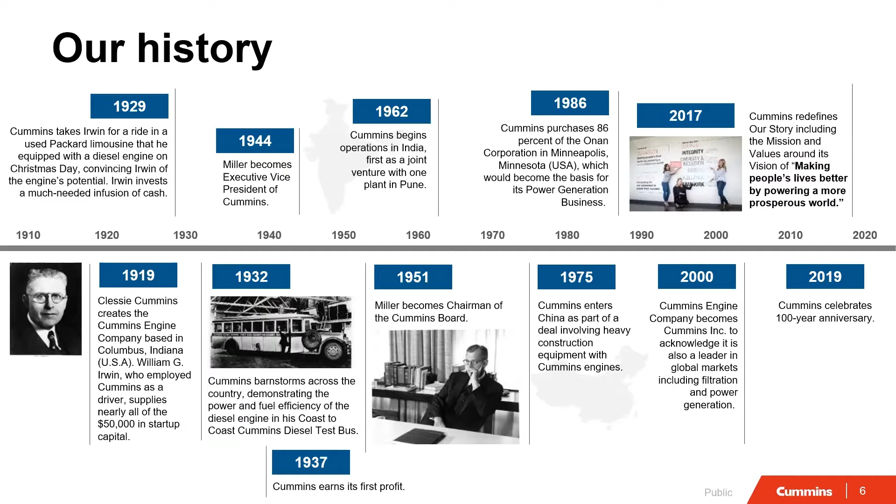As we continue to power a prosperous world in 2020, Cummins has grown into a multinational corporation. We're a Fortune 500 company with presence in 190 countries. We employ over 57,000 people through our 8,000 distributor and dealer networks. In 2020 alone, we built over 1.3 million engines and invested close to $1 billion in research and technology.

As you know, Cummins caters into a wide variety of markets and applications. We are in anything from heavy light-duty trucks to construction equipment, from fire pumps to oil and gas rigs, from power generation to defense and rail - you name it.

However, today's focus will be on our marine portfolio, which includes the Cummins propulsion engines, the auxiliary engines, the marine generator set, and the Onan range.

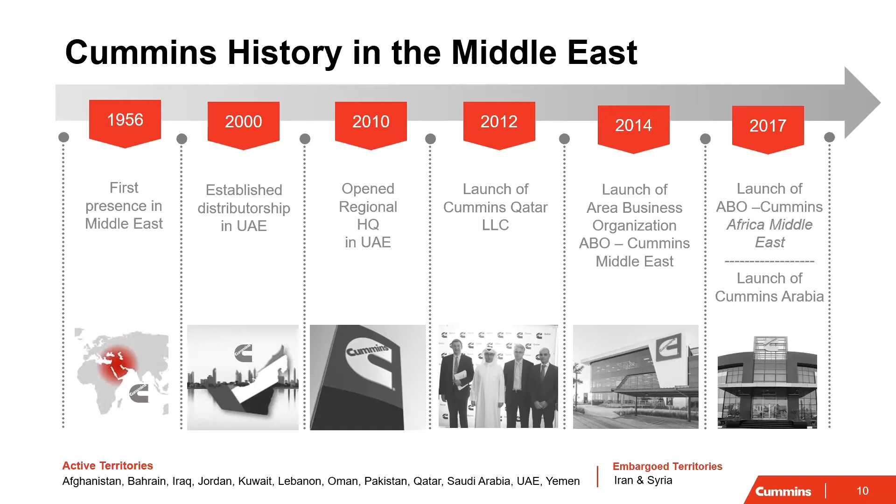Now, Cummins made its first presence in the Middle East in 1956. We set up our first distributorship in UAE in the year 2000, followed by our regional headquarters in Jebel Ali, which was opened in 2010. In the year 2012, we saw the launch of Cummins Qatar, followed closely by the launch of the Cummins Middle East Area Business Organization. Finally, in 2017, we set up the Cummins Africa Middle East ABO and the Cummins Arabia joint venture.

So back to the question of who we are. Cummins Arabia is a joint venture with Cummins Inc., the parent company, and the Saudi-based Olayan Group. It was set up in the year 2017, and we represent the Cummins distribution business in the UAE, Saudi, and Kuwait. Cummins Arabia has an extensive dealer and service network, which comprises 11 service branches, 8 warehouses, a master rebuild center in Jebel Ali, and a world-class state-of-the-art training facility also in the Jebel Ali headquarters.

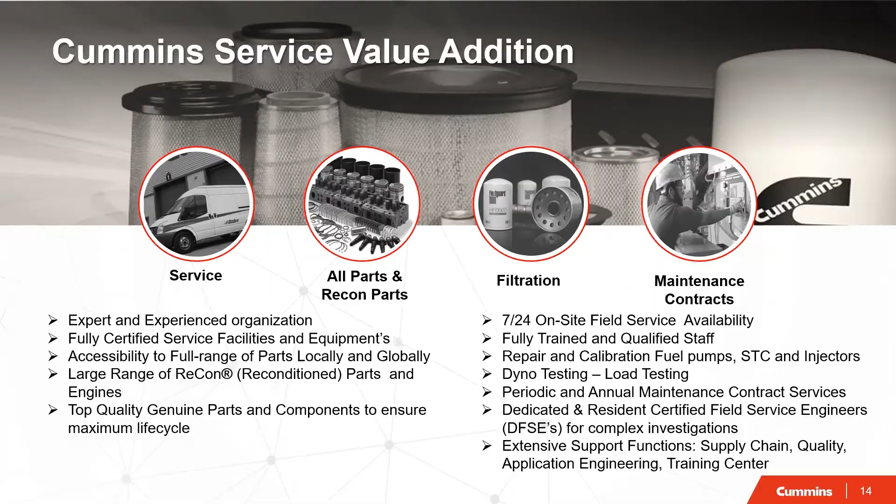Here you can see our build-up capabilities for our service locations in the region. We have a very wide inventory level benchmarked to other providers. Our total stock value is around $40 million, and most of this stock is located in UAE, around $22 million of stock parts we have in UAE. But more than this, we have global online visibility to all Cummins main warehouses globally. We call them PDC.

We also have visibility to all other distributors around the world, and can see their stocks online. So if any part is required and available anywhere in the world, we can quickly see, locate, and order it. We also have emergency order, engine down order by air freight facility, so we can bring this part to you in the shortest time.

In UAE, we have 2 service centers and 2 fuel rooms, which do the repair and calibration of fuel pumps and injectors. All our facilities and processes are ISO 9001, OHSAS 18001, and ISO 14001 certified. All the equipment and measurement tools are regularly calibrated and certified so we can maintain a standard in our jobs.

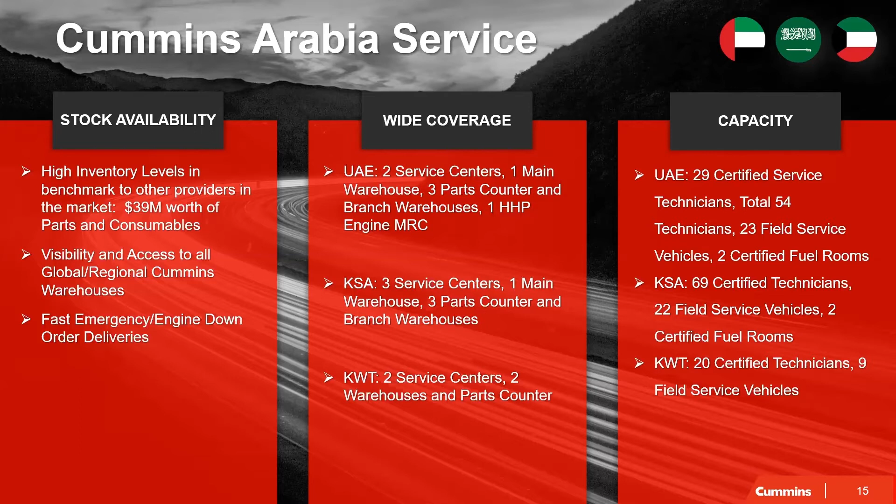Here you see the service locations in the region under Cummins Arabia. In the field, we are providing 24 hours, 7 days service to our valuable customers. We have a customer call center with a single number which you can access 24 hours, 7 days.

When you call for any need, even after hours, the call center will reach the relevant supervisor on duty. This supervisor plans the jobs, arranges the parts from the warehouse, and deploys the technician to your site, to your vessel, for the job in after working hours as needed. All our technicians have their own pickup trucks, which they keep with them all the time, so even after hours, we can deploy them directly to the site in a fast way.

We provide 100% genuine Cummins parts, including Recon components like cylinder heads, injectors, fuel pumps, and turbochargers from our globally certified Recon centers with global warranty coverage. My colleague Prafula will give further details about this later today.

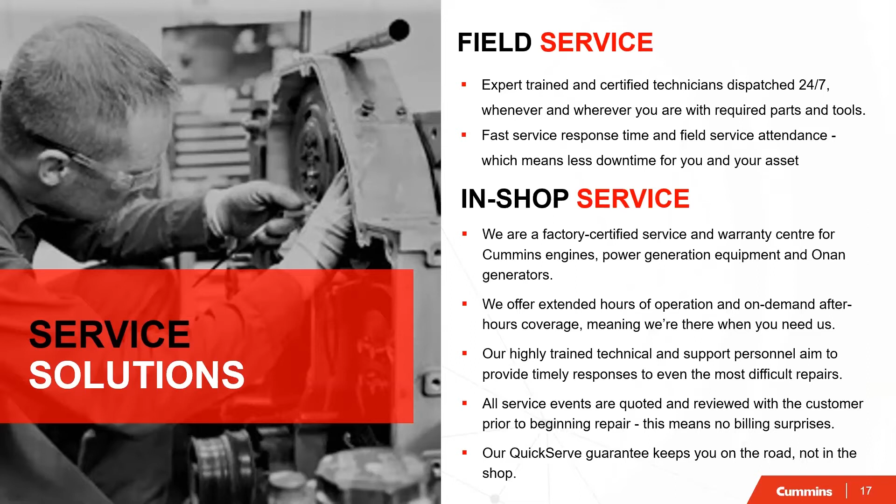We are also offering PMC, periodic maintenance contract, and AMC, annual maintenance contract, packages and contracts to you. We can plan and schedule a full scope of periodic preventive maintenance activities for your units. You can follow up the running hours with us and plan and execute these maintenance activities to help maintain a good life cycle for your units and prevent more major problems. Normally, this offer is mostly preferred by genset fleet owners and facility management companies, but we also offer this to our marine customers and certain customers who have contracts with us.

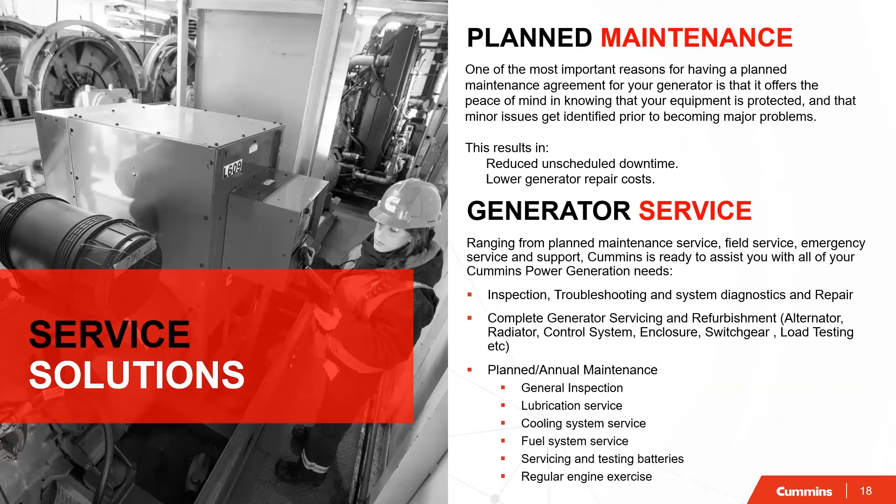Other than the engine, we also do generator servicing and generator refurbishing. We can provide a complete genset refurbishment. This includes control systems, alternator, cooling system, and radiator servicing. So these are all within the scope of our service capabilities.

In UAE, we have 2 resident dedicated field service engineers. These are highly experienced engineers who are trained and certified by Cummins factories. As you know, engines and generators are complex technological products, and they may develop certain complex problems over time. The DFSEs are capable of performing complex troubleshooting on your products. They have full access to all engineering information about your products - design, manufacturing, and application engineering documents. They also have an engineering counterpart in the factory, so through the investigation, they get full factory support from this engineering counterpart. They can conduct a detailed root cause analysis on any problem with a systematic approach and complete technical resources.

Finally, we have a training center located in Jebel Ali. For us at Cummins, we believe that helping our customers understand and know their Cummins products better is not only for your benefit, but for ours too. However, due to COVID-19, classroom trainings were suspended from 2020 onwards. Now we've started to plan new classes with limited attendees. So if you have any training needs, please advise us and contact me. We can provide the classroom schedule to you for your team and technical staff.

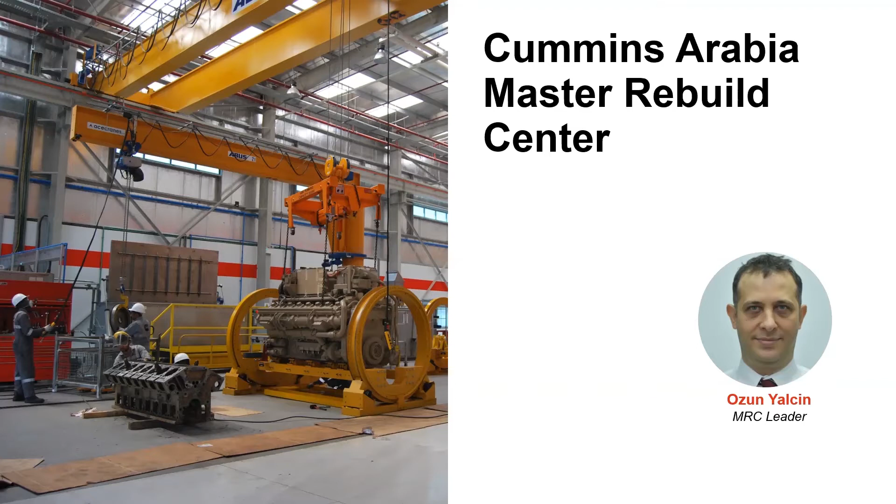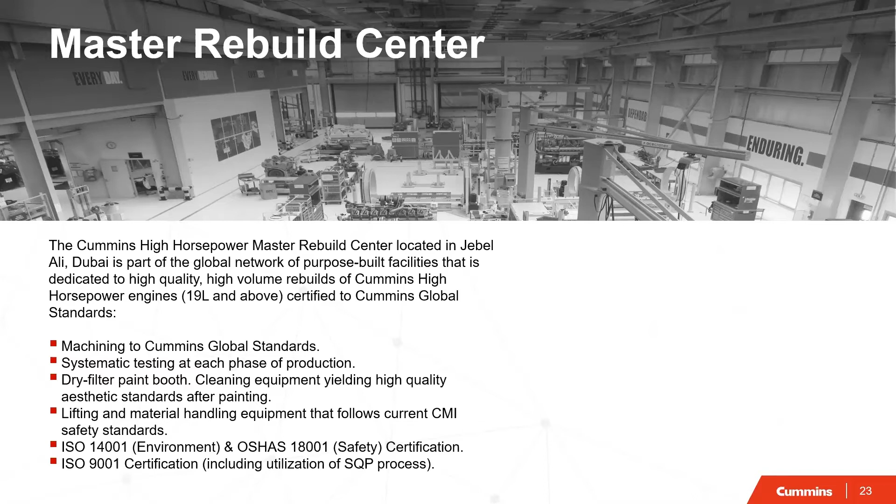Our Master Rebuild Center - we use the abbreviation MRC for that, you will hear that a lot, and it stands for Master Rebuild Center. MRC is located in Jebel Ali. It's a dedicated facility for rebuilding high horsepower engines, 19-liter and above. Rebuilds are done in a progressive assembly line. We have 2 assembly lines, and everything is done as per Cummins global standards using original, genuine Cummins parts. At the end of the assembly, engines go into testing, and then after that we have a paint process. I'll come back to those details later.

I'd like to start with the definition of rebuild. After certain hours of running, wear increases over time on the engine, and the engine needs to be disassembled and reassembled again. In Cummins language, rebuild means assembling the engine in a way that it goes back to brand new engine specifications, brand new engine conditions.

For this, MRC has a standard bill of material, and the majority of the performance parts are replaced. We ensure that the engine goes back to brand new engine specifications by testing it on our fully automated dynamometer. We run a full load test, check every single parameter on the engine, and compare it with brand new engine parameters. This way, we can say it's like a brand new engine, with a full life cycle just like a brand new engine. That's how we can give a 1 year full warranty on the rebuilds.

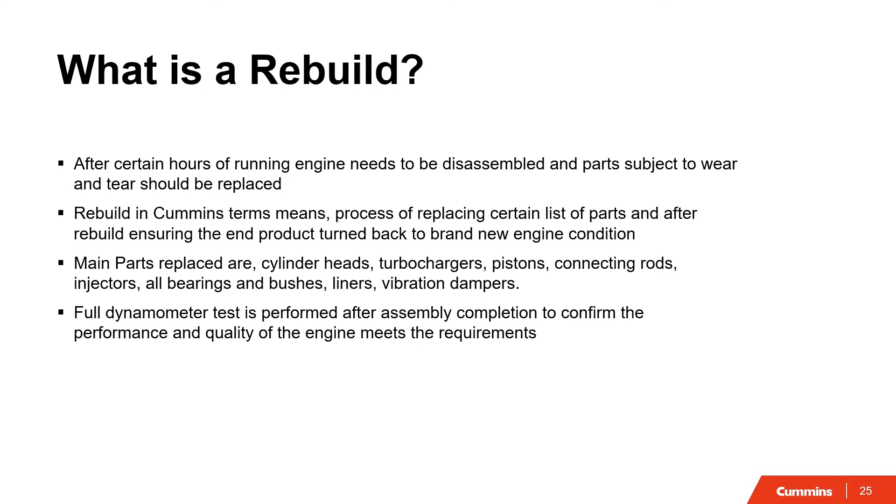One question we're often asked is: when is a good time for a rebuild? The basic answer is there are no standard hours defined for that. It just depends on so many factors, like which application it is, whether the engine is well maintained, and what environmental conditions the engine is running in.

And also the load factors. Is it too fluctuating load? The running habits, just is it overspeeding for a long time? So these are the things that affect that.

But for an engine run at an optimum value and well maintained, we suggest our customers take 25,000 hours as a good running time for rebuild. Because the wear and tear goes steady most of the time throughout the engine's life, and then there comes a point where wear increases much more rapidly. This is the phase right before major component damage or even catastrophic failure, so rebuild has to be done before that.

For an engine which is not well maintained, 25,000 hours can be way too long. For example, a mining truck, 25,000 is too long. It's just too late for rebuild.

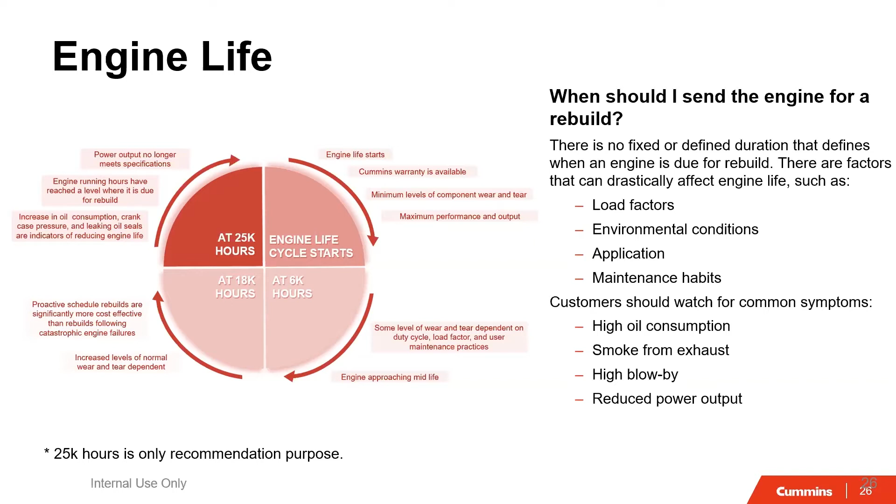So our customers should continuously be checking the signs and symptoms indicating the engine needs a rebuild, like power output is one indication, and also smoke, blow-by, high oil consumption, and leaks coming from everywhere. These are the indications that the engine is going to need a rebuild.

So another question we've often been asked is: what is the difference between rebuild and overhaul? Actually, these are two different concepts. In the rebuild, the engine goes back to brand new original spec, and on the overhaul that's not the prime aim, the prime target. Rebuild has a standard bill of material, so no matter what, these parts are going to be changed. On the overhaul, it's most likely an inspect-and-reuse-if-possible logic.

Rebuild comes up with a standard price, and if the block and crank are good and the major components are good, there won't be any surprises. On the overhaul, it starts with a smaller scope, and there will be add-ons.

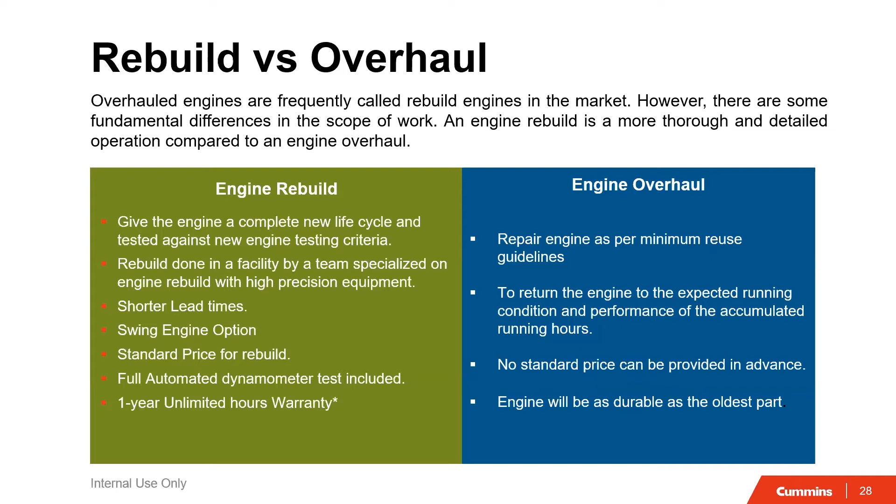So we provide a longer lifetime on the engines with rebuilds. These are the customer conveniences. We've gone through this throughout, but one of the major conveniences for the customer on a rebuild, as I said, there are no surprises, and the customer can drop their engine and then pick it up. There won't be so many communications or discussions needed—it's just going to be a simple task for the customers.

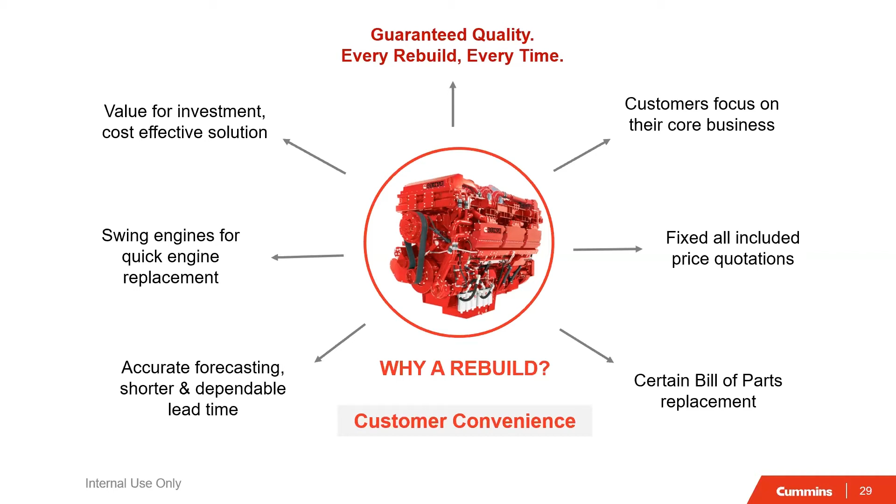And also, Cummins has swing engine options. We have the shortest lead times compared to overhaul, even in-frame overhaul, and the rebuild quality—we've gone through all of this.

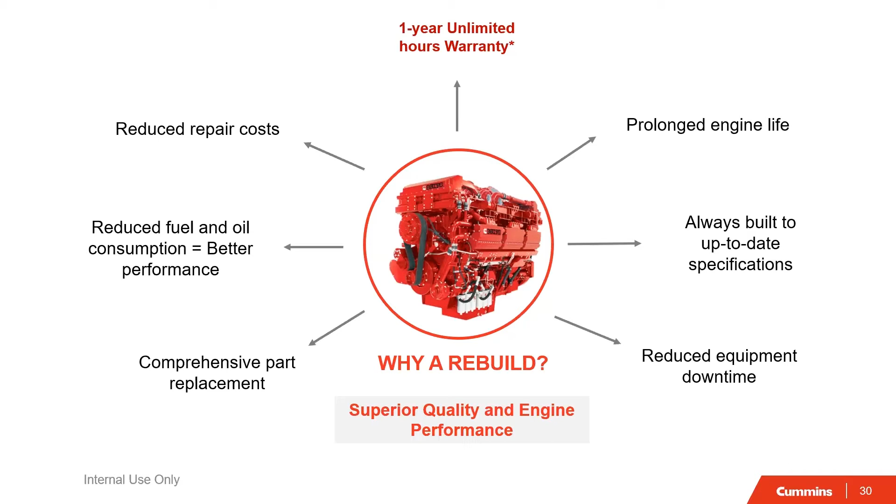So about our Cummins Arabia Master Rebuild Center: we started building this facility in 2011 and completed it in 2012 May, and it has been actively operational since then. We can build up to 500 engines, and on average per year we are rebuilding around 250 to 300 engines every year. As I said, this is a dedicated facility for high horsepower engines.

We build 19-liter and above engines, from 19-liter up to 95-liter, for any application: marine, genset, mining, construction, oil and gas, pumps, power gen, any application.

And the throughput time varies depending on the model, changing from 12 to 18 days. Average for the KTA 50, the most common model in the region, is around 13 to 14 days. We guarantee this.

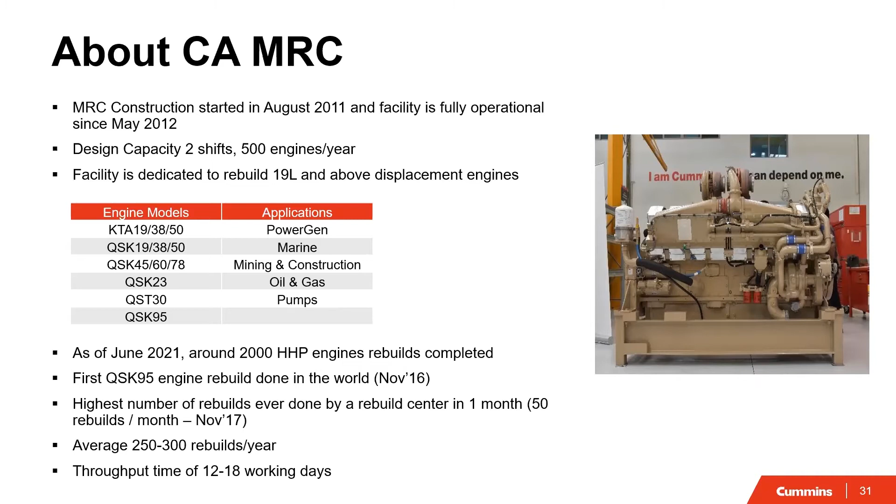After the implementation of International Maritime Organization's NOx limits on January 1st, 2016, part of Marine Pollution Annex 6, the regulation governing marine emissions became significantly tougher. Cummins realized the impact emission regulations have on our customers, especially those entering emission control areas, which today are North America and the Caribbean Sea, and by January 1st, 2021, the North Sea and Baltic Sea.

Cummins added selective catalytic reduction after-treatment to the already existing QSK60 Tier 2 engine, meaning the Cummins after-treatment solution is just a plug and play solution. So if you'd like to upgrade your current QSK60 Tier 2 engine, you just need to install the after-treatment system, and there's no change needed on your current QSK60 engine. This way we deliver the most customer-friendly solution possible.

There are some upgrades on the engine, like improvements we maintain first: the life to overhaul, which is 1.1 million gallon fuel burn, and better overall total fluid consumption, including fuel, lube oil, and diesel exhaust fluids, which we're talking about in the case of IMO Tier 3. Cummins also offers QSK50, QSK38, and QSK19 engine platforms, which can also be offered for EPA Tier 4 and IMO Tier 3 solutions.

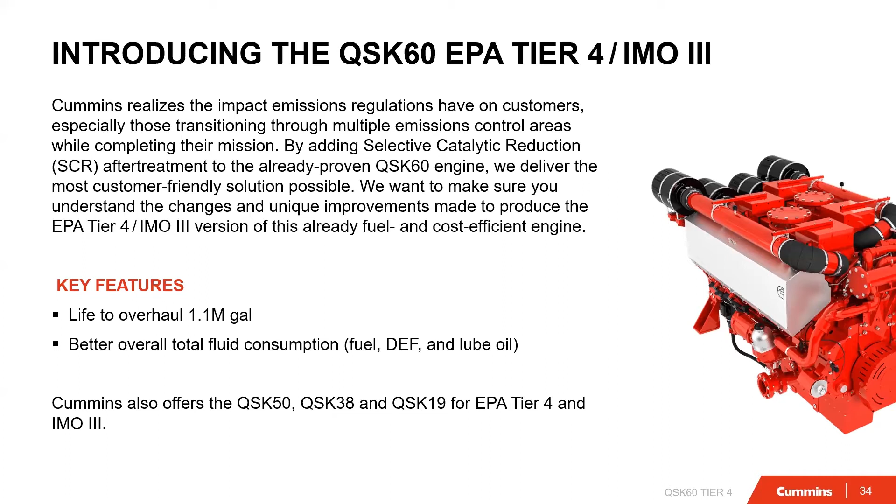So who is it for? The market segments listed here are not limited to Tier 3 applications, but those are the segments Cummins products mostly fit in, which are tug, tow, and push boats, inland waterway vessels, barges, cargo ships, boats, thrusters, auxiliary applications, supply vessels, offshore support vessels, crew boats, wind farm support vessels, passenger vessels, ships, and ferries. Especially in the North European market, we've been working on applications like live fish carriers, fishing trawlers, and other special use segments.

Let's look at the engine features. If you look at the rating table on the left side, you'll see different ratings from continuous to medium continuous duty, changing from 2000 horsepower to 2700 horsepower for the QSK60 engine, which comes with a Tier 3 or EPA Tier 4 solution. There's only one 60 Hz fixed speed rating available today, which can be used for auxiliary and diesel electric applications, and a 50 Hz rating is also on the way.

The general specification of the engine is not different than the current QSK60 Tier 2, IMO Tier 2 engine. The displacement is 60 liters, and the overall engine length, height, width, and weight are totally the same -- as I mentioned, it's just a plug and play solution. But the total weight of the complete package with the after-treatment solution adds another 1.4 tons on top of the engine, so the total package is around 10.1 tons.

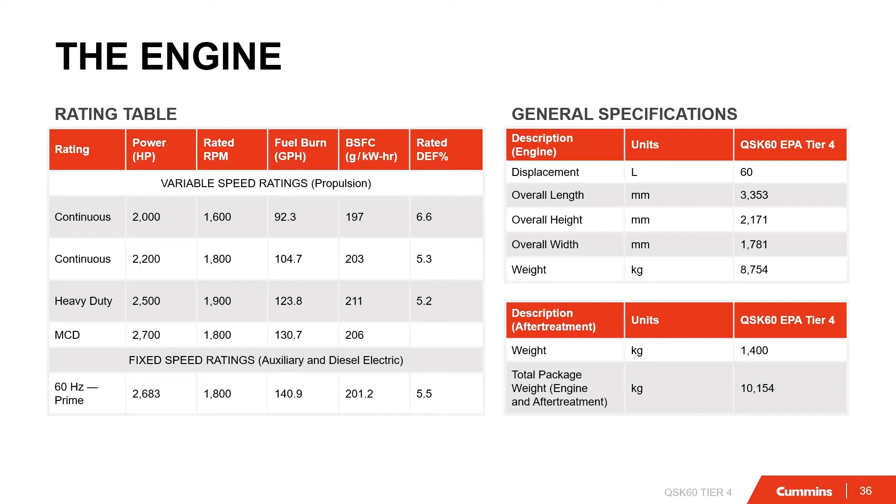One critical point to mention: if you look at the column showing the percentage of rated diesel exhaust fluid consumption, the most common urea concentration used in the market today is 32.5%. But Cummins engines have the flexibility to operate with a urea concentration between 32.5% and up to 40%. What does that mean? If you use a 40% urea concentration, you can have a smaller urea tank on your vessel. Based on your space availability, Cummins provides this flexibility to give you more solutions based on the size and space you have available on your vessel. And of course, if you operate at 40% urea concentration, the rated DEF consumption is going to be lower -- and if needed, we can provide those numbers too.

Here's an image of the after-treatment system on the left side. It is EPA Tier 4, IMO 3 compliant. There are 4 different exhaust configurations, and in some cases we're able to work out custom solutions too. One-person activity via the service access panel, which is here -- it's very easy to remove. Then you have access to 40 bricks inside, which are the replaceable elements.

This is one key feature our after-treatment system has, because some products in the market don't have replaceable elements, so by the end of the service you need to replace the whole box. The system can operate anytime the engine is operating, and it can be stopped when you're going out of the emission control areas, so your engine will be back to operating at Tier 2 level. World-class competitive diesel exhaust fluid consumption, and all parts exclusively available and fully supported through the global Cummins network for all after-treatment parts.

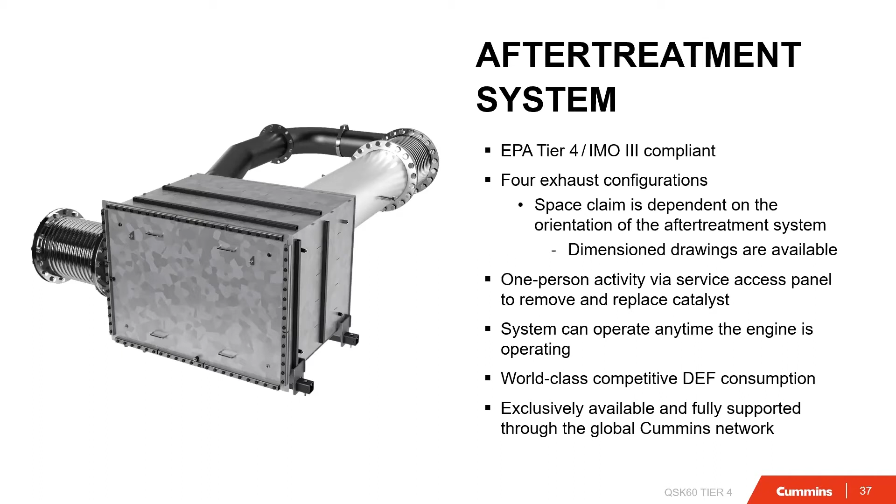Why Cummins Marine IMO Tier 3 solution? First, the reliability of the K60 engine, which is very well proven in the market over the last 15 to 20 years. The same transient response as the current Tier 2 engine, and up to 3% fuel improvement over the current EPA Tier 3 engine.

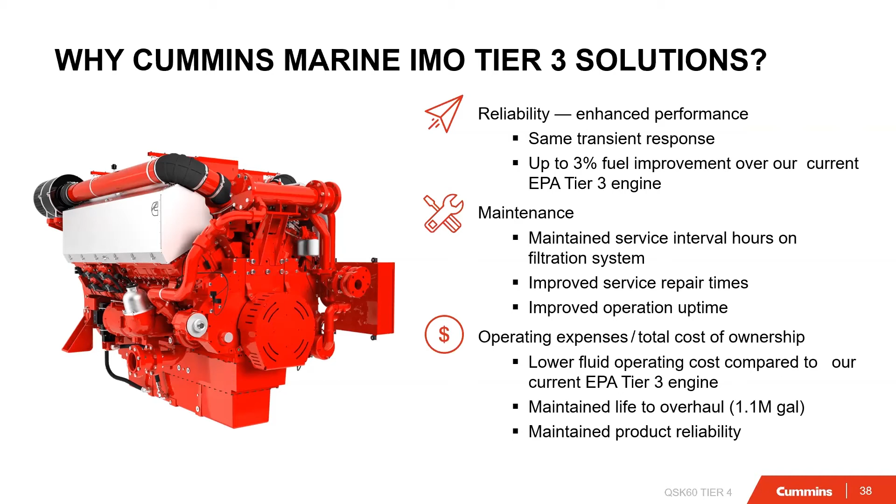Maintenance is aligned with the engine maintenance intervals, so you're not going to maintain or overhaul your after-treatment system before the engine reaches overhaul hours. The operating expenses and total cost of ownership benefit from the 3% fuel improvement, lower operating costs compared with the current EPA Tier 3 engine, and life to overhaul is still 1.1 million gallons fuel burn, with product reliability maintained at the same level.

What is the difference between Tier 2 and IMO Tier 3 product? Here are points in different colors. The green points show design, part life, and quality improvements, the red points show performance improvements and positive customer impact, and the blue ones are the regulatory requirements. I'd like to focus on the green points, which are the emissions - engines meeting IMO Tier 3 and EPA Tier 4 emission levels, and meeting the Green Passport requirements.

The after-treatment system is supplied by Hug Engineering, a third party, but all parts are supported through the global Cummins service network, and Cummins Arabia is one of them. Urea dosing and plumbing is the reason for the 3% fuel improvement, and there's marine control panel integration so you can control your after-treatment system.

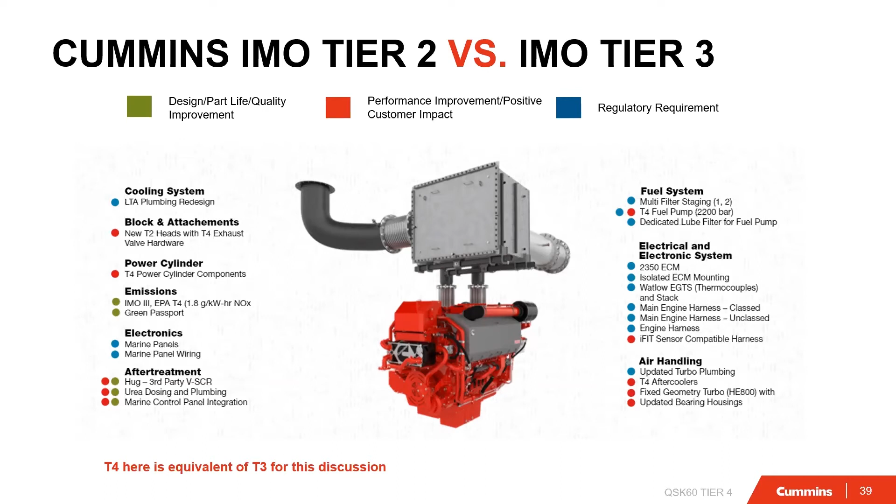The K60 engine is built in Daventry, United Kingdom, and production started in April 2021. Cummins has already provided equipment for some projects going on in Europe. Please make contact with your local Cummins representative - you can reach out to Vivek or myself if you have any projects related to Tier 3 or EPA Tier 4 emission levels.

Thank you, Mustafa. Good morning everyone, and hello. Today I'm presenting Cummins Filtration, known as Fleetguard, as the technical sales support for the Middle East and North Africa region. Today we're going through the filtration presentation.

To start, I'm going to show you where our place is in Cummins Incorporation. So who we are as Cummins Filtration - we deliver the power of Cummins through 5 complementary operating segments. Cummins Incorporation has all of these 5 segments, and in each we compete worldwide with a number of other manufacturers. We can list the engine business, which builds the range of diesel, natural gas, and all the application engines that we have, especially the marine one.

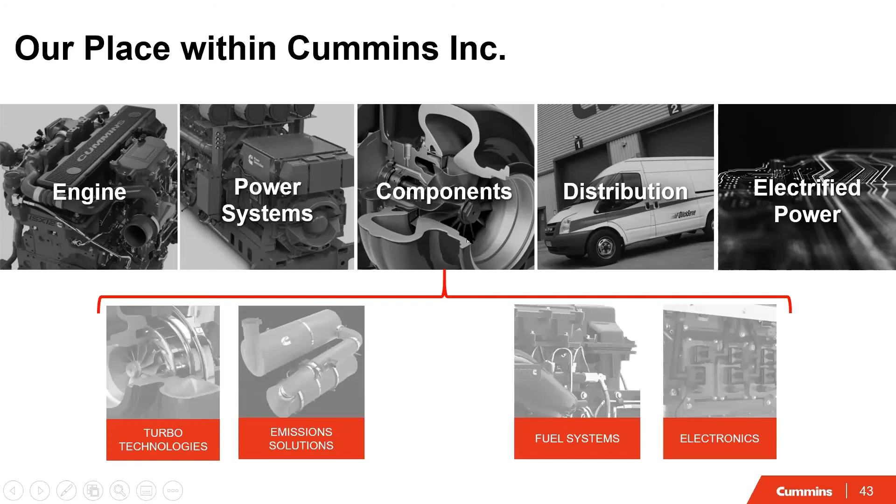The power systems segment provides integrated power through design, manufacturing, and sales of engines of 16 liters and more for all applications, especially marine. The components segment, which filtration is part of, sells filtration products, after-treatment systems, turbochargers, fuel systems, electronics, and transmissions. These components are integrated into the engine business to make it run cleaner and with more power. The distribution business is the biggest customer-facing part of Cummins, where our distributors and dealers are based around the globe, providing products, services, and support to customers who rely on Cummins products for power.

And at the end, the electrified power segment - a startup business for Cummins, but started in a quickly changing market landscape. Its formation better positions Cummins to maximize synergies, foster strategic alignment, and coordinate in a more holistic fashion in electrification, just as we are in the diesel and natural gas business.

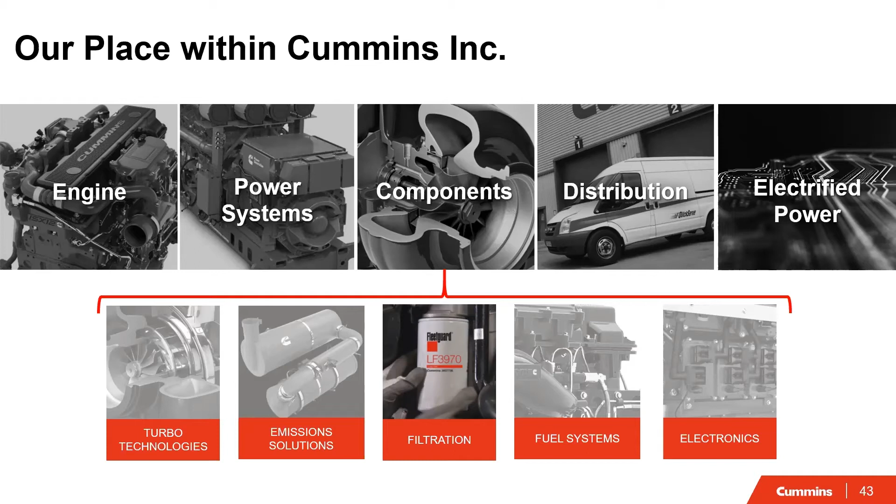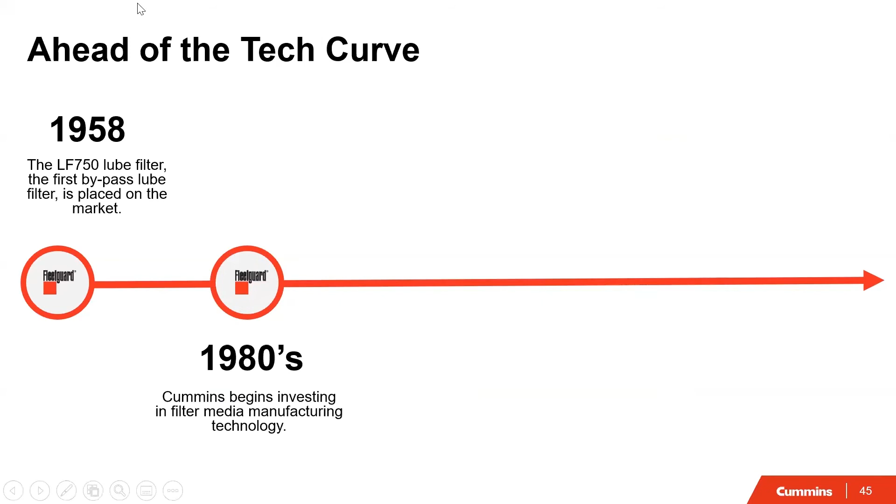Moving to the next slide, we can see the trend of the filtration business that we have. Over the years, Fleetguard, or Cummins Filtration, has invented new technologies. Back in the mid-1980s, Cummins began investing very heavily in media manufacturing technology to develop new kinds of filtration media for the heavy-duty diesel engine market.

So the first fruit of this time and resource spent was our industry-leading patented synthetic media called StrataPore, which was released in the late 1980s, which we still very much use in Fleetguard filters today. Then in the early to mid 2000s, as environmental regulations to help reduce vehicle emissions began to ramp up, and as a result of using our science to technology approach, our proprietary NanoNet media was born and helped usher Fleetguard into a new age of fuel filtration performance for our customers.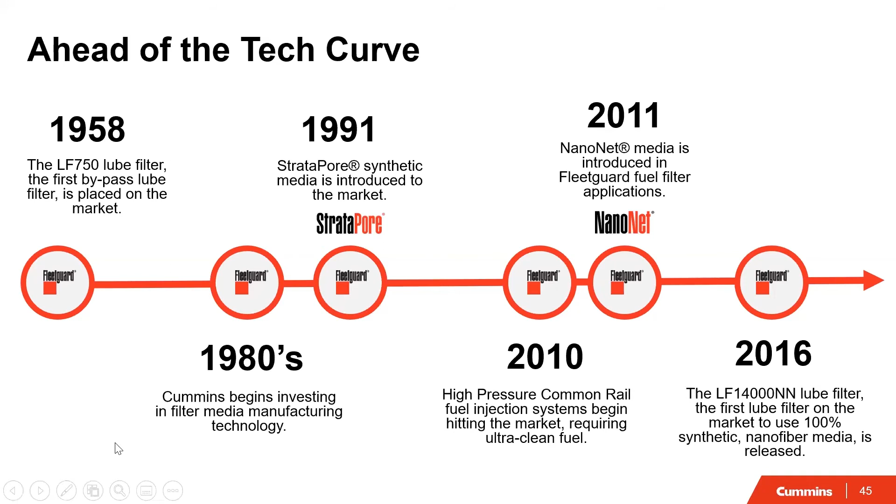So as you can see, NanoNet media was published in the year 2011. So moving to our brands, or our types of filter media.

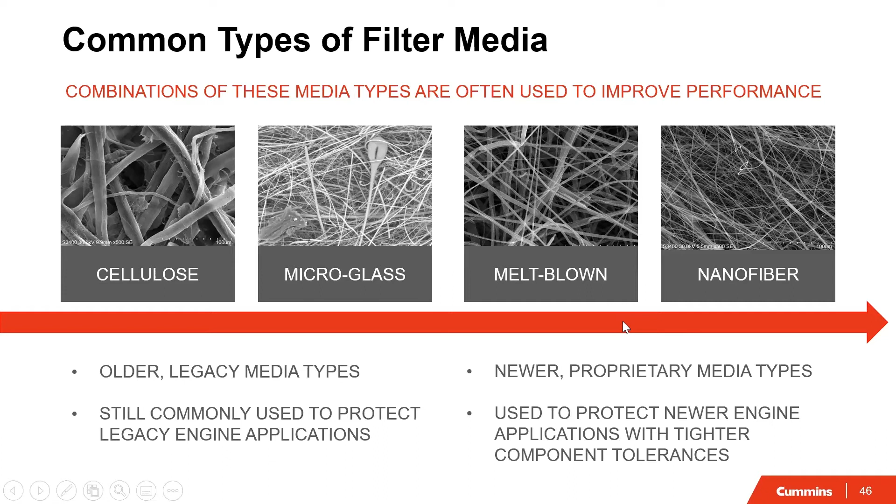We can list the two oldest generations as cellulose and microglass, which are not being used as much as the melt-blown media, which is StrataPore and NanoNet, because StrataPore and NanoNet have more efficiency, have more capacity to hold contamination, and could go up to 1 micron of efficiency. So these two, StrataPore and NanoNet, are very much used, especially in our hydraulic and fuel filtration, because they can stop and hold a lot of contamination, going to 1 micron of dimension.

Moving to the next slide. So why Cummins Filtration, or why Fleetguard? When we are talking about Fleetguard, we have to mention that Fleetguard is part of Cummins Incorporated. One of the reasons that this gives us an advantage over our competition is the working relationship with Cummins, the world's largest independent diesel engine manufacturer. So not only do we develop filtration for today's engines, but we are constantly working on filtration technology for the engines of tomorrow. Whenever there are changes in engine design, we are already part of that development process and see what trends in engine design are coming before they actually arrive in the market.

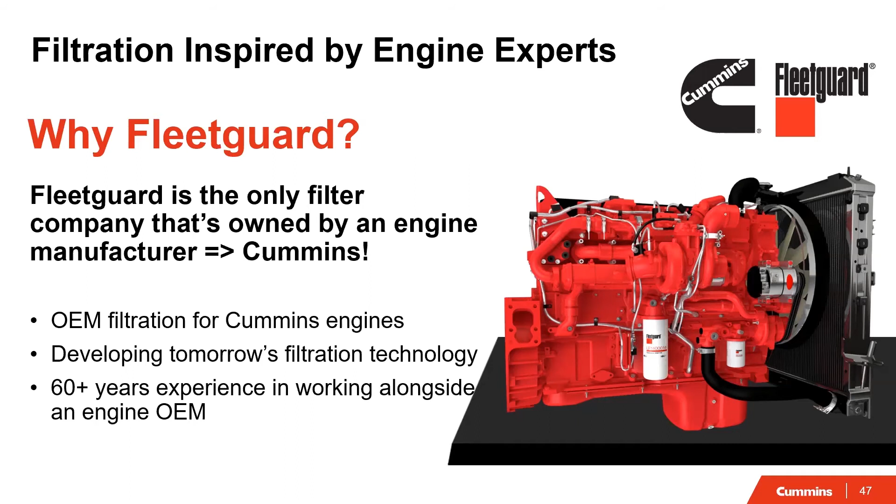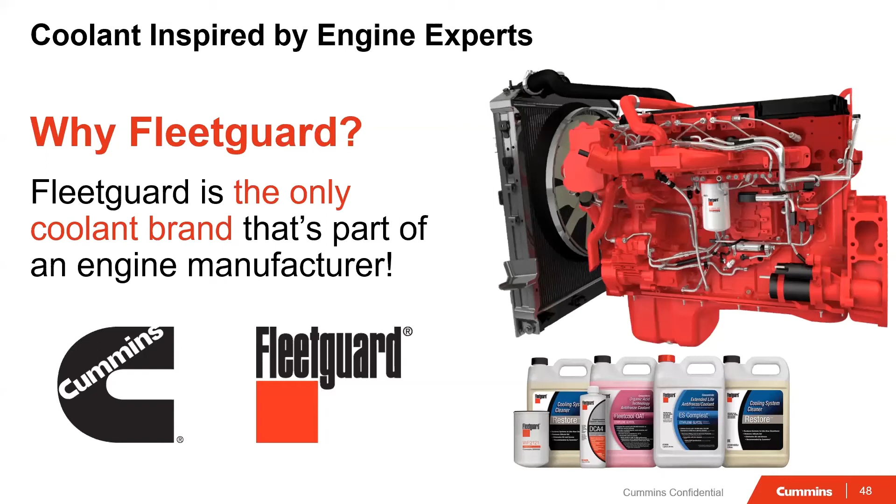So why Fleetguard? Not only do we produce filtration products, but we also have coolant products. As you can see, we have a big brand of coolant products. We can go to the organic additive technology, the newest technology, and also we have the conventional ones, the inorganic additive technology. So we have a whole product line, a whole brand for coolant as well, to serve our marine customers, to serve our products, and to serve our systems going through.

So this is the slide where we can see the big trends and the big brands that we have. That's a quick dive into our media filtration, but let's get back to our products. In terms of core product lines, Cummins Filtration has over 8,000 part numbers in our portfolio of filters and coolant, including air, fuel, lube, hydraulic, as well as crankcase ventilation, and a full line of coolant and chemical solutions.

The latest technology we have introduced to the marketplace is Fleetguard Fit, which stands for Filtration Intelligence Technology, which we announced publicly last year. Fleetguard Fit is designed to bring digital connectivity and real-time data reporting to the hands of the customer, to better predict downtime, synchronize service events, and ultimately optimize their maintenance spend on filtration and oil. So we are now based on telematics. Whenever telematics allow the usage of such systems, our systems are available to accept and fit into our machines, into our boats, into our vessels, to use this Fleetguard Fit.

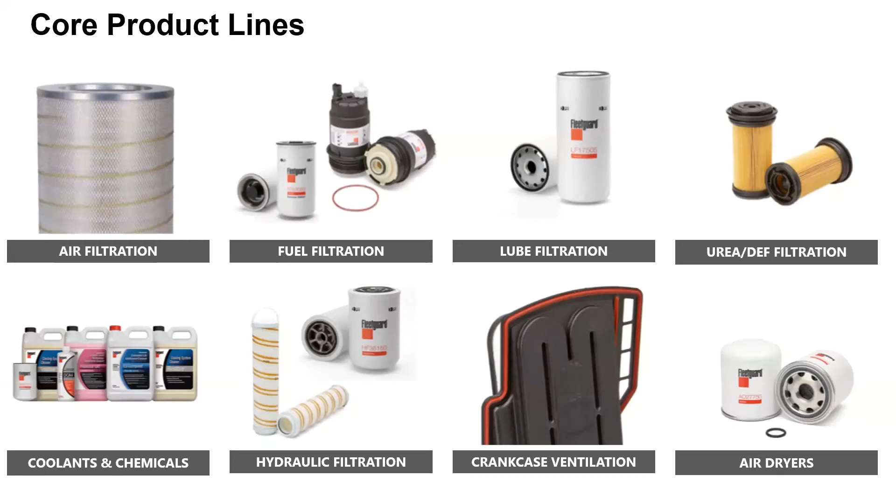So why Fleetguard in general? Why use Fleetguard and why are we here? We always guarantee that all of our products meet the OEM specifications. Fleetguard makes all its products meet or exceed OEM specifications. Different OEMs have different specifications as well as performance criteria for their filtration products, so they ensure their engines and other systems get maximum life. Different products have different specifications, but Fleetguard can cover them all. With Fleetguard products, you get the same quality and performance criteria, and the benefit to you is that you ensure you're using the original equipment product specifications by using Fleetguard, and especially that Fleetguard is a one-stop shop for your application.

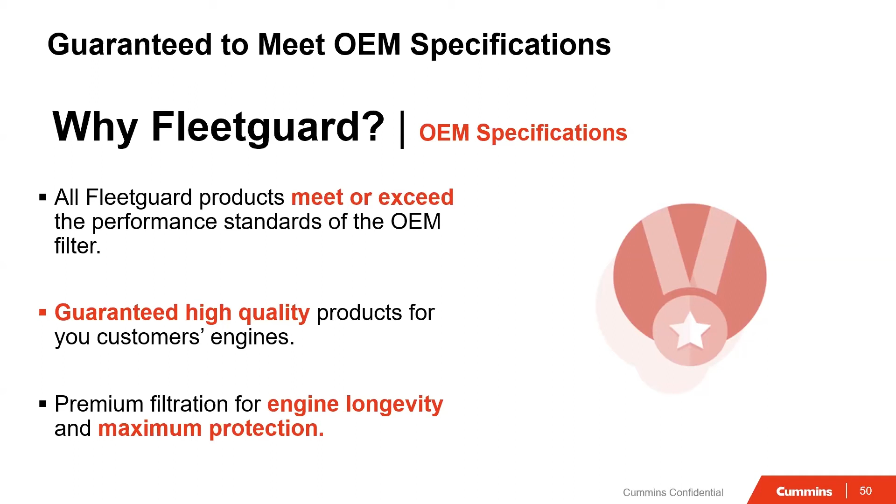As for the warranty, our warranty is a non-prorated warranty. We are providing our customers the best warranty coverage in the industry. It's our ongoing promise that we want to be your supplier for life. Our non-prorated warranty guarantees that we will always be there after the sale. If a Cummins Filtration product defect ever necessitates repair of the engine or component, the Cummins Filtration warranty covers reimbursement of reasonable cost to replace or repair that failure, whichever is less, for the damage of the engine or component. So we ensure that our Cummins Filtration warranty goes beyond all other competitive warranties, with the most dependable premium coverage available anywhere in the world.

As you can see in front of you, we have a big list of products for the marine application specifically. Talking about how different our products are from the competition is something very clear. However, for the marine application specifically, Cummins Filtration takes hold of all this expertise to use where failure is not allowed over the vessels and the request for the best filtration takes place. So for this reason, our marine section holds air filtration, crankcase ventilation, fuel filtration, as well as all of our certified performance products like lube filters, coolant, and chemical products, and many more.

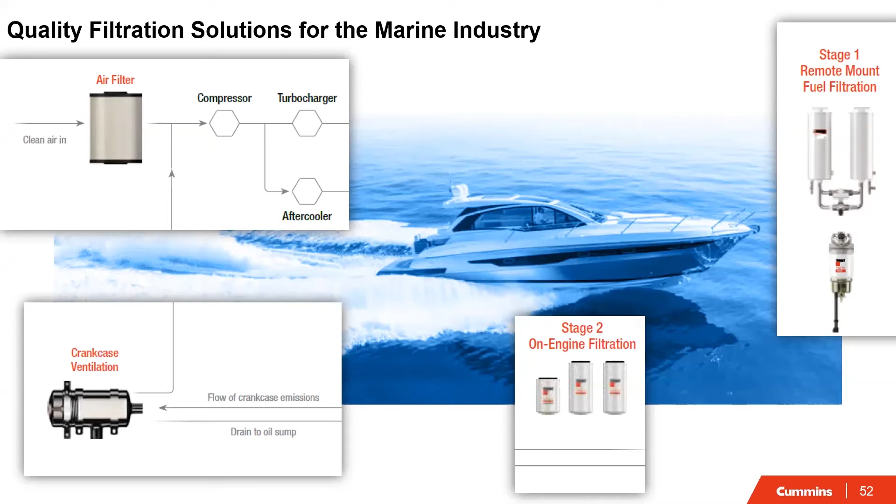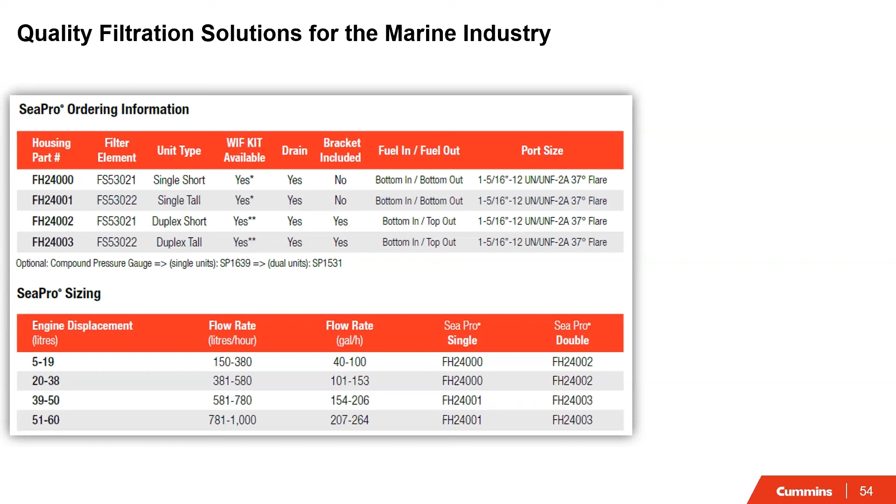In here, for the first section, we have the fuel filtration product. Our fuel filtration specifically produced for the marine are the SeaPro family. So the SeaPro family are the filtration products manufactured for the marine industry. We can see that we have a huge list of filtration products that can cover all the vessel types, all the vessel volumes, especially going through the biggest ones while we are using our SeaPro product. So we have the whole product range going from very small flow rate, very low fuel flow rate, going to a very high flow rate using all of these products in front of you. So whenever you need a fuel product, you can go through www.cumminsfiltration.com and you can get these lists and product types and part numbers from these brochures online.

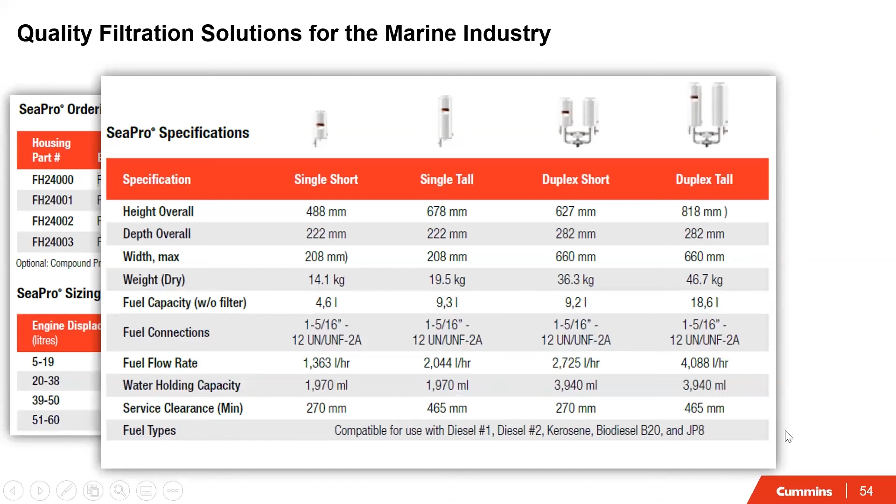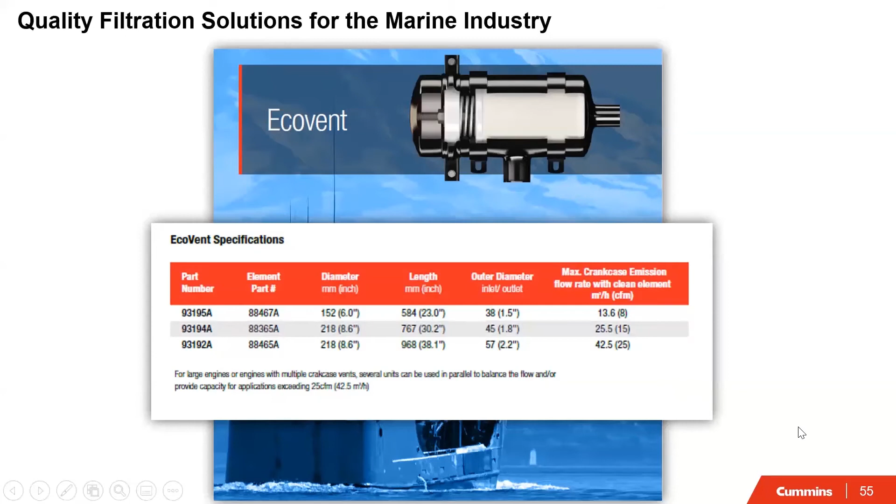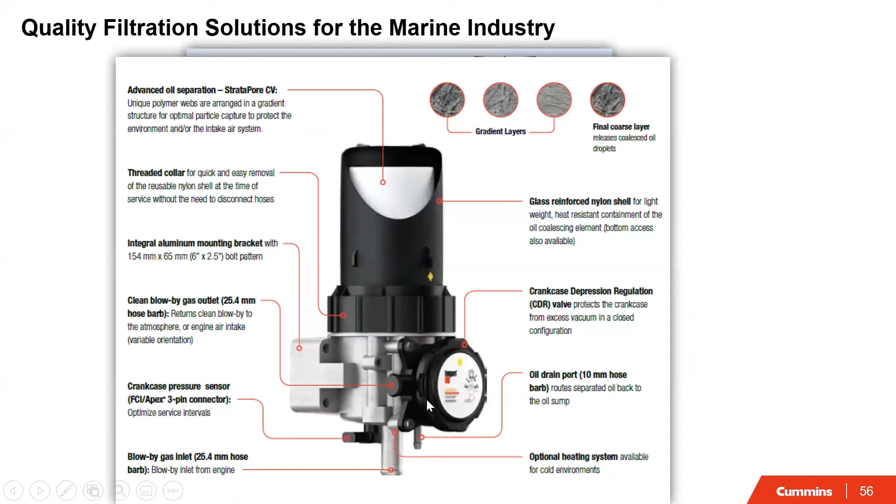Also, we offer the EcoVent, the closed crankcase ventilation. This closed crankcase ventilation is patented for Cummins Filtration because they use the Stratapore media, our patented media, inside. So we have the Stratapore inside and we can get a very clean output and blow-by output to the outside without any trace of oil or any trace of oil vapor in that outlet.

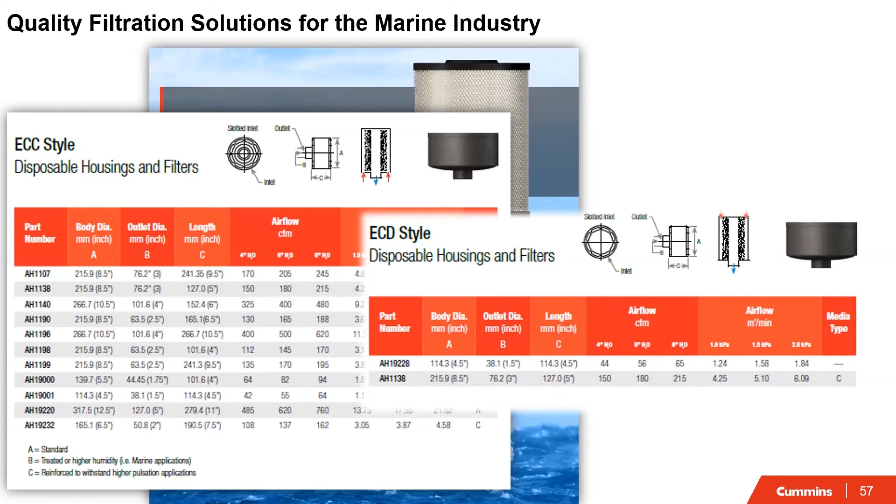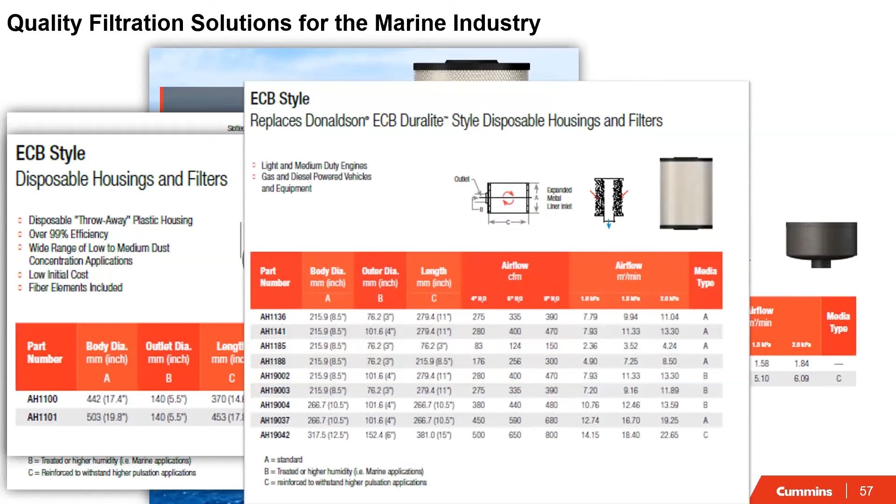Going to our air filtration family, we can offer a very big range of these air products, a very big range of styles of air filtration. All of these air filtration products are 99% effective against all types of contamination, especially the contamination going through the smallest dimensions. And we are talking also about water vapor, about the small dirtiness that could be found in the engine compartment inside your vessel.

Okay, so the topics I would like to cover are recon components. There we'll talk about the core and the remanufacturing process involved. The next topic is about genuine versus non-genuine, where we'll talk about the differences as well as the impact on the part and on the engine itself. And the last topic is about kitting and bundling. So let's start with our first topic, that is recon components.

As you know, recon parts are generally repaired and rebuilt to restore to good condition. But Cummins recon parts are not only repaired or rebuilt, they are remanufactured to original specification. That's something additional we are providing, and it's not only to original specification - we try to reach the latest specifications as well. Because for some parts there could be supersessions or upgrades, so while remanufacturing we take care that if there are any latest supersessions, the part is updated to those specifications. In addition, recon parts have the same product quality and the same product warranty as the new part.

So I'd like to highlight a few features of recon parts. These parts are manufactured using the latest Cummins design technology, as well as advanced material wherever applicable. Then a second feature, which is quite important, this helps to improve engine performance and helps extend the duration between two overhauls. That is again a pretty important feature.

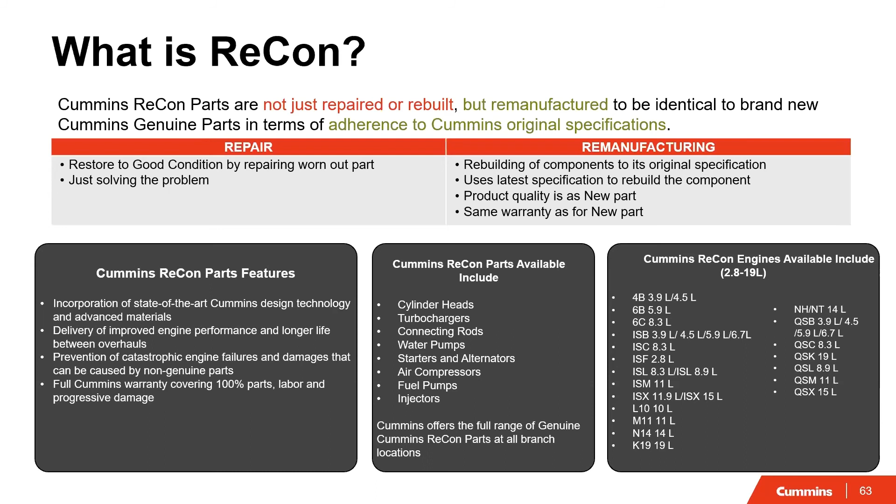Next slide, we will talk about the remanufacturing process. Last slide we talked about what exactly we mean by remanufactured parts. So the remanufacturing process really talks about the 6 different steps that we are following in remanufacturing a Recon part.

It starts with returning. Returning is pretty important, because once the core is returned, the plant can start remanufacturing that part or engine. And once the plant receives that part or engine, they start with the disassembling process, which is the next step after receipt.

Once it is completely disassembled, and we are taking care that each and every part of the engine and the component itself is disassembled, we can clean it thoroughly using the latest cleaning technology, and every foreign particle which could be there is completely flushed out.

Once cleaning is done, we are inspecting the whole part and the engine again, to check whether it really fits into the remanufacturing criteria or the Cummins specifications. Once the inspection is over, and we find that this is something which could be remanufactured, then the restoring process starts.

In the restoring process, as I mentioned before, we are remanufacturing a product to meet the original specification or the latest specifications, if there are any. Once this is complete, we are testing the product so that we ensure optimum performance as well as reliability.

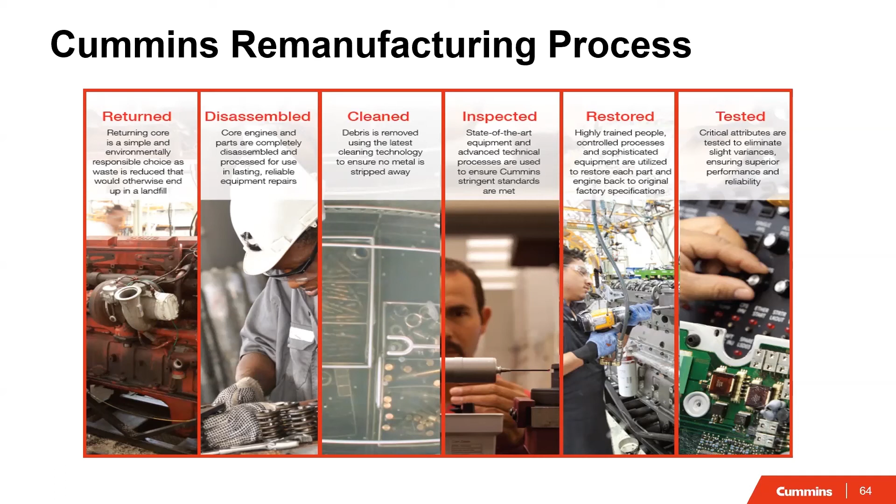So just to summarize, the Cummins remanufacturing process is divided into 6 different categories: returned, disassembled, cleaned, inspected, restored, and tested. So moving to the next one from here.

So I talked about core, right? When we receive core, that is the used component, the plant can start the remanufacturing process. So what is the advantage for a customer to return core? It's pretty straightforward - the exchange price involved is the first direct benefit for you.

Apart from that, there are 2 indirect benefits as well. First, reduction of wastage, because these engines are unused, lying in your shop floor or warehouse. This could be shipped back to our plant, so that would reduce wastage from your side. At the same time, you can free up the space as well, whether the engine is lying on shop floor or warehouse. So these are again 2 very important and critical features of returning core.

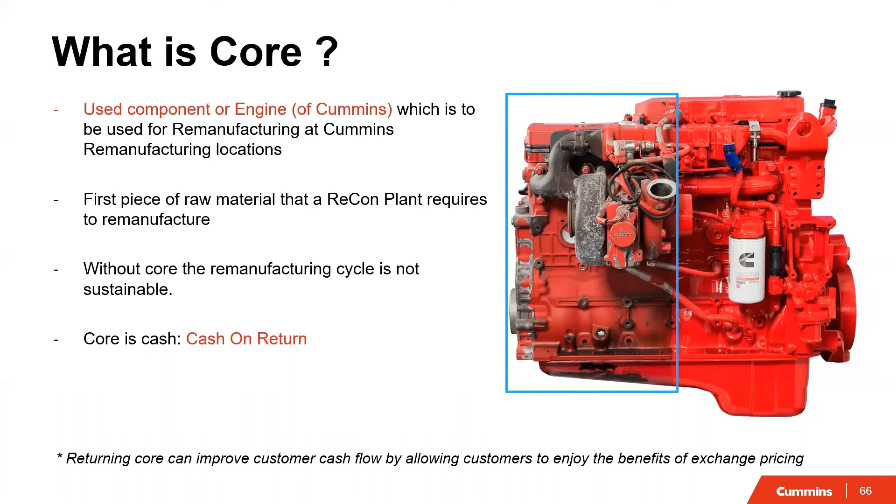Then moving to the next one. This is the topic which I mentioned in my first slide, that I will take you through how to identify a Recon version of a part.

We have a web-based portal called parts.cummins.com. You can use any of your internet browsers and type parts.cummins.com. The window displayed over here would pop up. Just click on the engine part section and type the part number which you want to check, to see whether the Recon option is available or not.

Once you type the part number, it would populate both options. If there is any Recon option, it would populate that as well along with the new part. And then you can take it further from there.

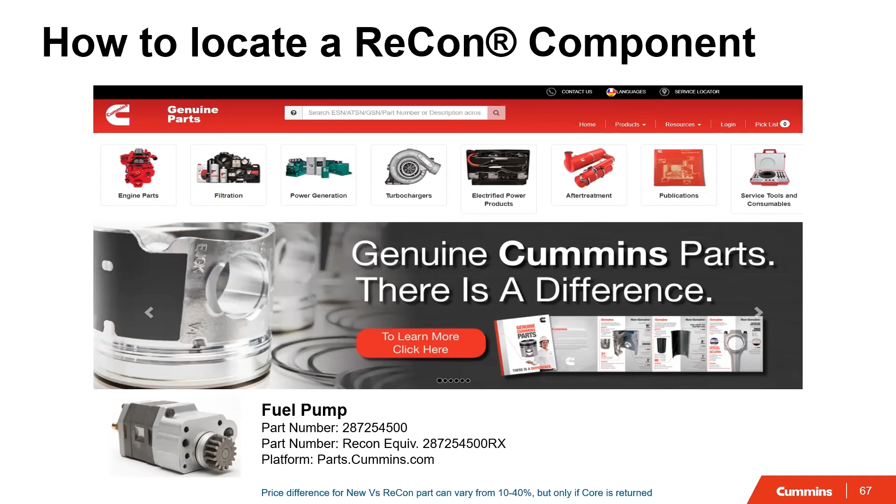So I'm moving to the next topic from here, that is genuine versus non-genuine. I'll start with a quick video over here, and then we'll start our discussions.

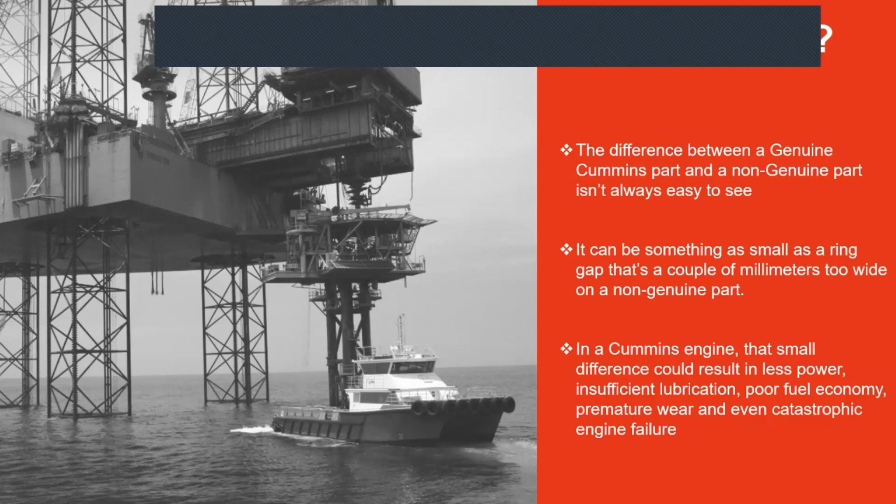I'll give you one quick example about a ring, the gap on a ring groove in a piston. You can see that ring over here. Visually, there's no difference as such. But when we tested it, there were differences in microns which really impacted adversely on the component, and it can result in catastrophic failure. This has resulted in less power for the engine and insufficient lubrication, along with the catastrophic failure.

I'll quickly highlight the features which are quite obvious when we manufacture genuine parts. These are precisely manufactured to specific standards using the latest and advanced technologies, and we perform rigorous testing when manufacturing these parts. Most importantly, these genuine parts are offered only through authorized distributors in the region. In UAE, Cummins Arabia is the only authorized distributor from where you should source your genuine parts.

When we talk about non-genuine, these are generally reverse engineered, we call it a copy. In our aftermarket language, we call it will-fits. There are a lot of question marks and doubts about how these are manufactured, whether any specific standards are observed while manufacturing and maintaining quality, and bigger question marks about testing standards. When you compare copy with original, there is always a difference. A copy can't be 100% accurate to the original, so these differences play an important role.

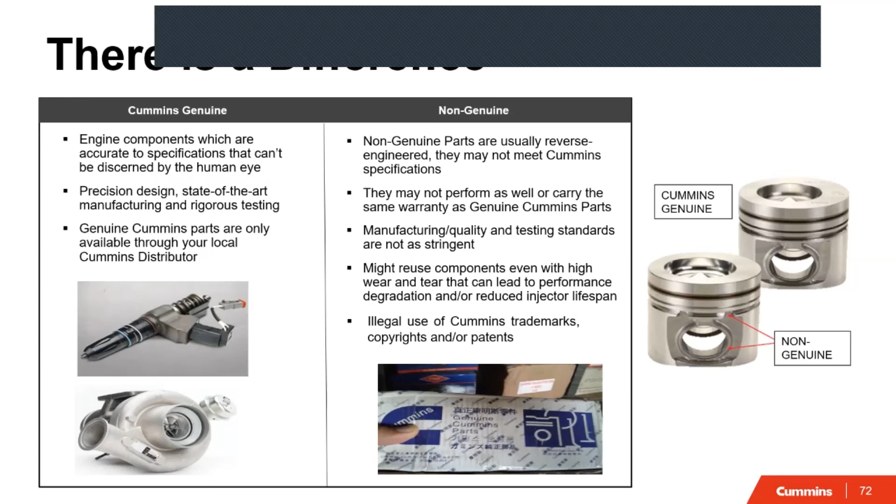I'd like to highlight one more thing quickly. I was talking about the differences in specifications. Looks like there's some time gap in moving the slides. Yeah, okay, got it now.

As I was saying, with copy products there is a difference. They are not exactly similar to what we manufacture in the genuine space. We tested around 515 copy parts, and none of them were found to be close to Cummins specifications. This has consequences as well - if a part is not really manufactured according to Cummins specifications, there could be an adverse impact. I'd like to give you an example of how they fail.

The failure modes are across different spectrums of parameters - hardness failed, material of construction failed. So different aspects of these products are failing.

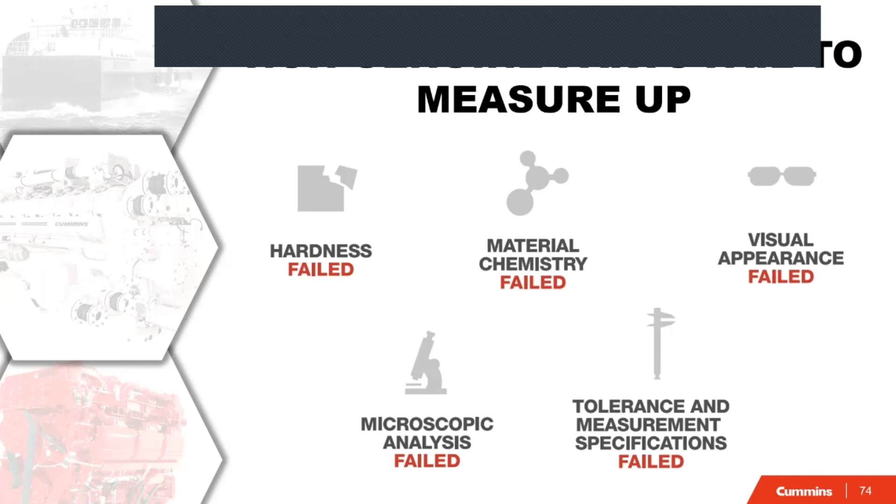I'd like to give you one more example about piston, ring, and pin, which are really the heart of the engine. I'm not sure why I'm not able to shift the screen - looks like there's some time gap. Please bear with me. Yeah, so you can see these three components.

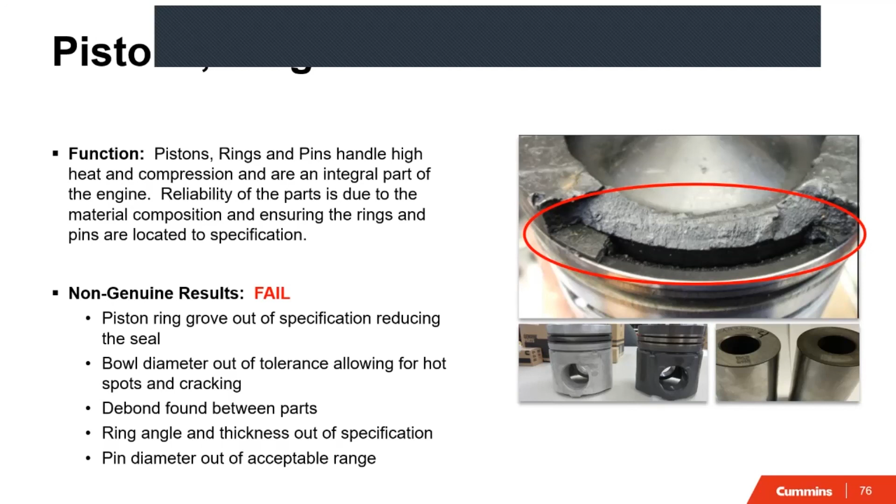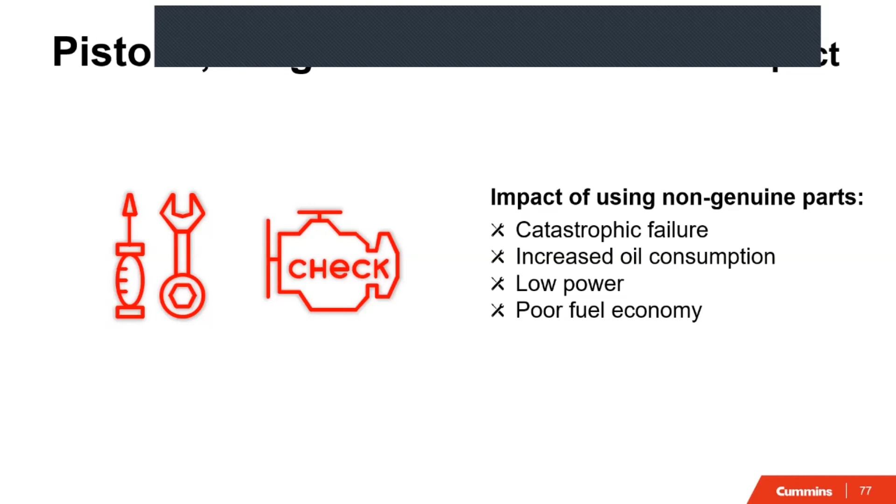These are like the heart of the engine. When we tested, we found gaps in specifications - the piston groove was out of specification, the ring angle and thickness of the ring were completely out of specification, pin diameter was out of specification, and even the bowl diameter was out of tolerance. When these four critical components don't meet original standards, the impact is obvious - increased oil consumption, reduced fuel economy, less power, and catastrophic failure. Though the difference is not visible by naked eyes, there is a big difference - even a minute change in microns could result in all these types of losses to you as a customer.

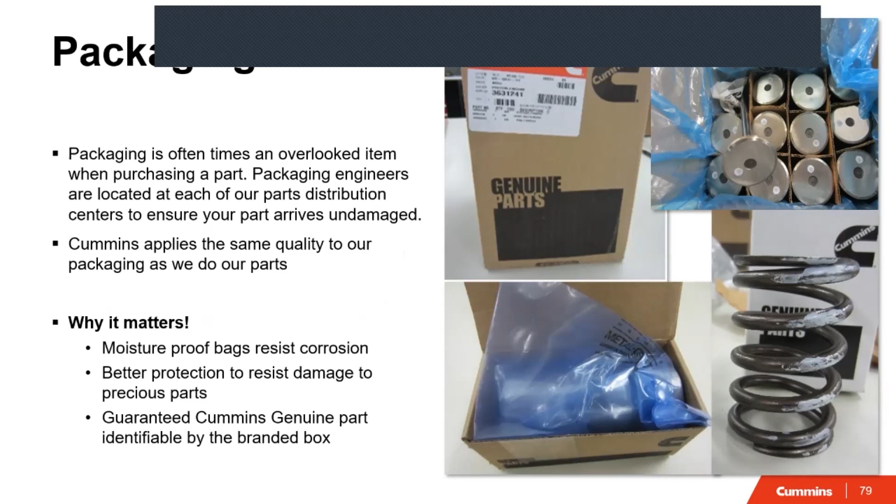The last thing I'd like to highlight is packaging. We ensure that the products we manufacture reach you in undamaged condition, and for that we have a team of packaging engineers located in different parts distribution centers.